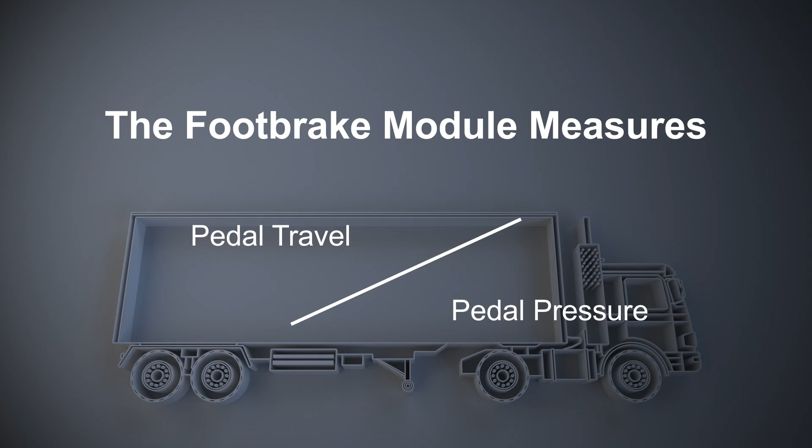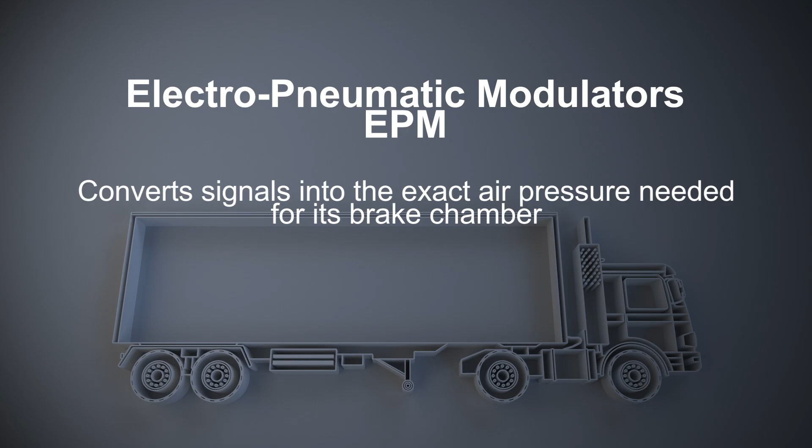When the driver presses the brake pedal, sensors in the digital Footbrake module measure pedal travel and pressure. That signal goes straight to the EBS control unit, which instantly calculates how much air pressure each wheel needs for stable, even braking. It then sends that command electrically to the Electro-Pneumatic Modulators, or EPMs. Each EPM takes the electronic signal and converts it into the exact air pressure needed for its brake chamber. The result? Faster, more consistent braking with stability, traction, and anti-lock control built into every press of the pedal.

And here's the best part: even if the electronics fail, the truck doesn't stop braking. It automatically switches to pneumatic backup mode using traditional air control to keep the truck safe and stopping.

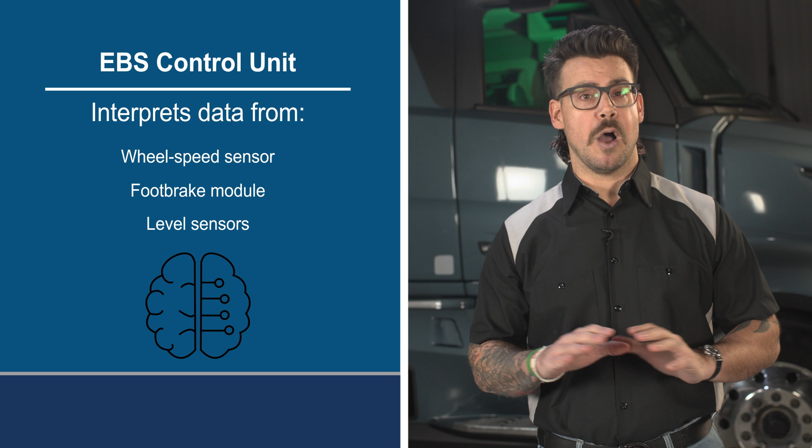At the top is the EBS control unit, the brains of the operation. It interprets data from wheel speed sensors, the Footbrake module, and level sensors to balance braking power across the wheels. Additionally, the steering angle sensor and yaw rate sensor are also used to determine braking pressure.

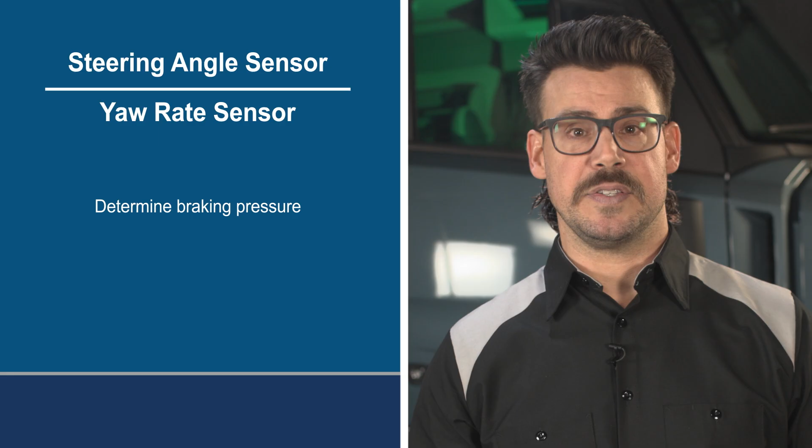On legacy trucks, the yaw rate sensor was externally mounted. Now it's integrated into the EBS control unit, thus mounting is important.

Next is the dFBM, or digital Footbrake module. This unit reads how far and how hard the driver presses the pedal. In normal EBS operation, it sends that input electronically to the control unit. But if the electronic braking system goes offline, the dFBM automatically switches to pneumatic backup mode, physically sending control air to the EPMs to apply the brakes.

These electro-pneumatic modulators are the hands of the system, delivering the air pressure the control unit requests. Each EPM is preloaded from the factory with its own software and firmware, so there's no need to reprogram the component if hardware replacement is required.

Front axles use single-channel EPMs. Rear axles vary depending on the configuration: single channel on a pusher, dual channel on a drive axle for traction control, and 2 dual channels if equipped with 6-channel traction control. For more information, see CBR 2533.

Finally, the eTPCM, or Electronic Trailer Pressure Control Module, functions just like an EPM, but it manages the trailer's braking air. It can also enter pneumatic backup mode if communication is lost.

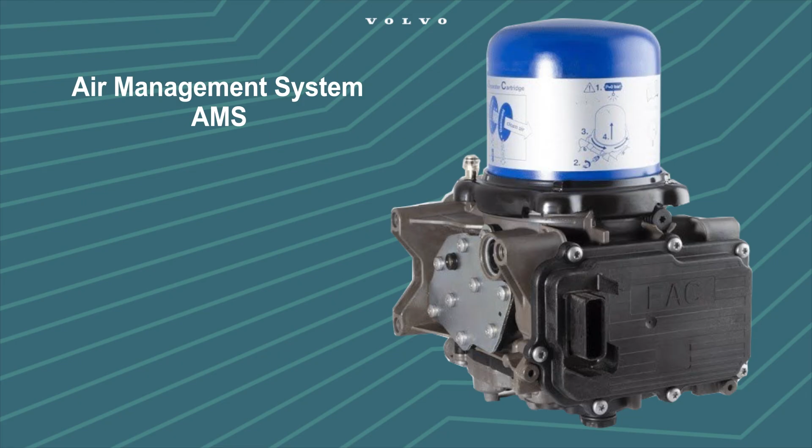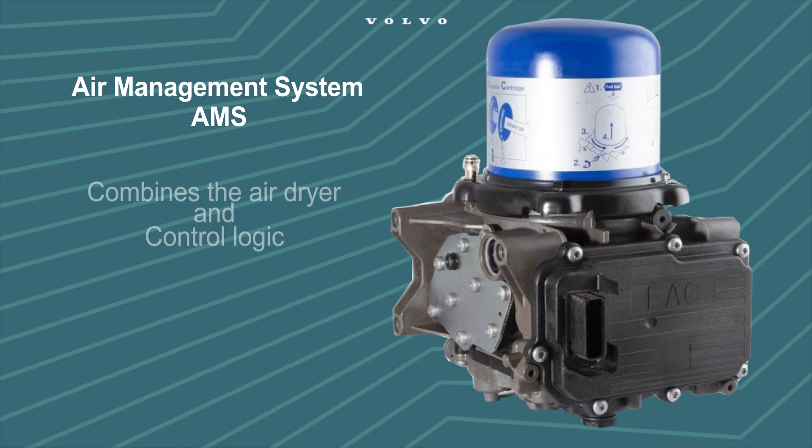Volvo's new air management system, or AMS, simplifies everything. The Air Production Module, or APM, now combines the air dryer and the control logic into one integrated unit. It filters moisture, oil, and debris from compressed air and manages the distribution of air through the truck's system.

It draws power from the 10-amp fuse FB26 in the 12-24-volt chassis fuse box and communicates with the chassis subnet via CAN and hand control units through LIN 12.

Drivers will notice the difference: no more mechanical brake knobs or complex air lines behind the dash. They'll see electronic parking brake levers, auto release when selecting a gear, and auto set when parking. This system's smarter, safer, and a lot easier to work on.

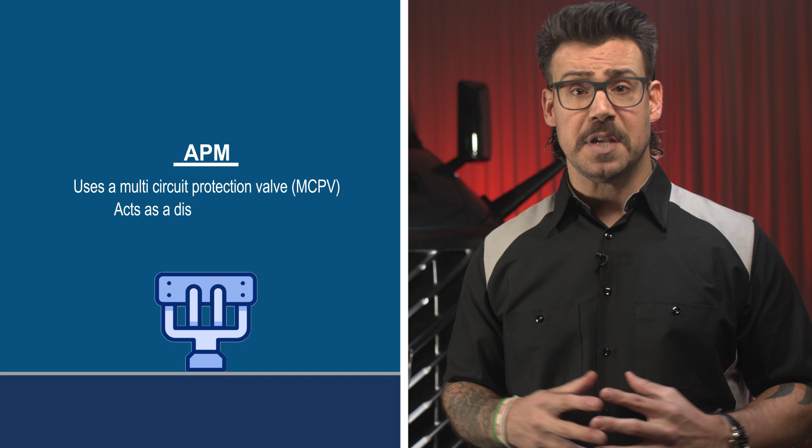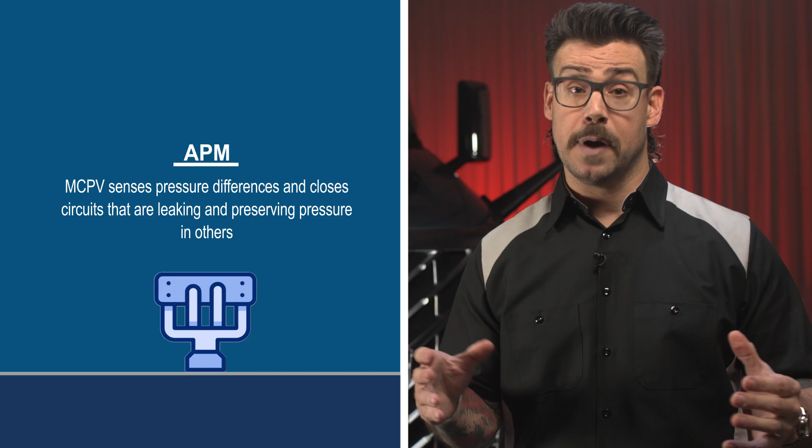Legacy systems rely on check valves to isolate failures. The APM now uses a multi-circuit protection valve, or MCPV, which acts as a distribution manifold. If a circuit starts leaking, the MCPV senses the pressure difference and closes that circuit, preserving pressure in others. When this occurs, the system will present an active DTC, which aids in troubleshooting.

That means the driver can continue driving at limited capacity. It's a smarter design that prioritizes braking power above everything else, keeping the truck safe and operational while protecting air reserves. Now, here's where it all comes together.

Under normal operation, the EBS controls the braking electronically. The control unit decides how much air pressure to send, keeping braking smooth and stable across all axles in all situations. But if the EBS loses a critical input, say a wheel speed sensor or pressure feedback signal, it automatically puts that axle into pneumatic backup mode.

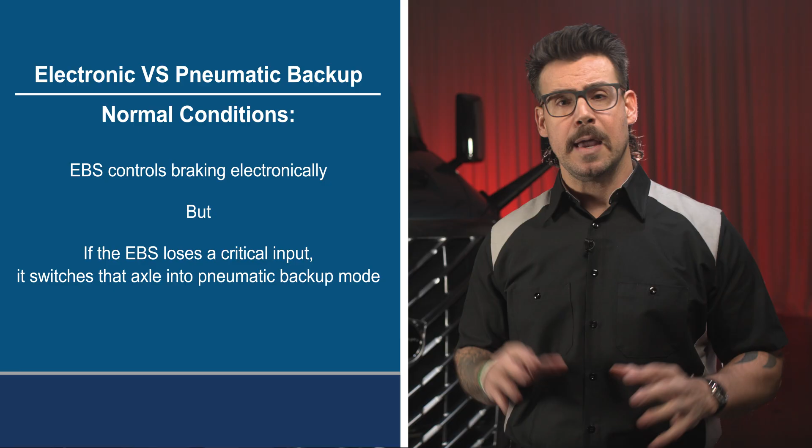In this mode, the dFBM bypasses the control unit and sends air pressure directly to the modulators. It's mechanical braking just like legacy trucks, but without the electronics balancing the force.

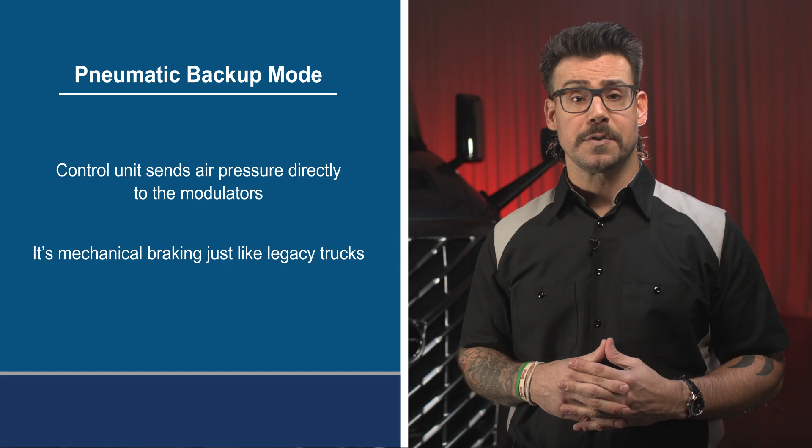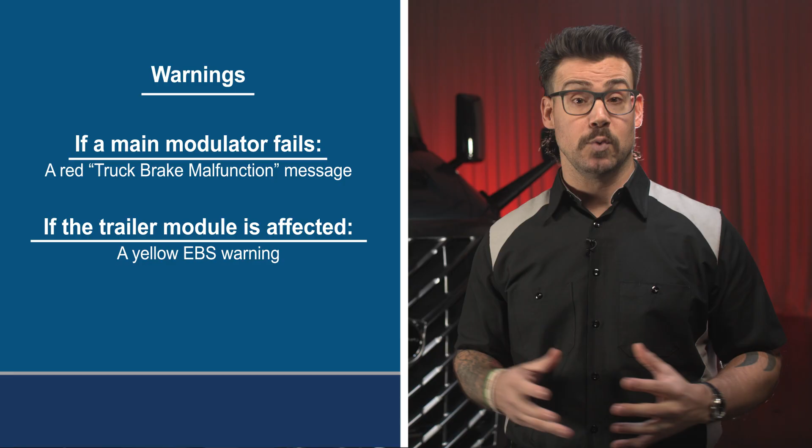When this happens, the driver will see a red truck brake malfunction message if a main modulator fails, and a yellow EBS warning if the trailer module is affected. During backup, brake safety features are disabled: no ABS, no stability control, no traction assist.

The brake pedal feels firmer, response changes slightly, and stopping distance may increase.

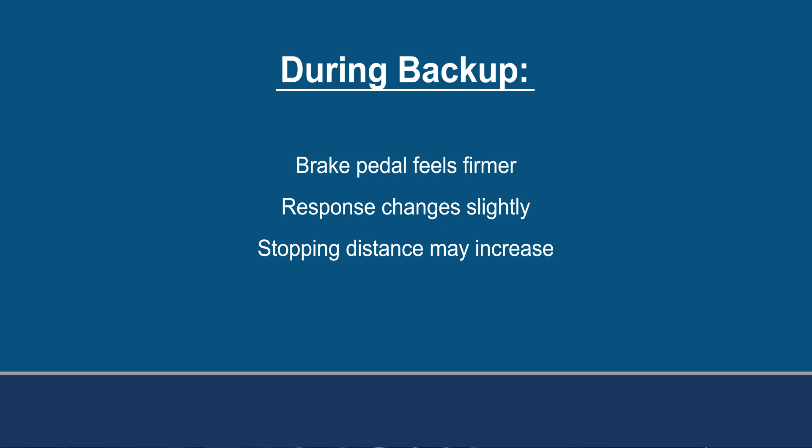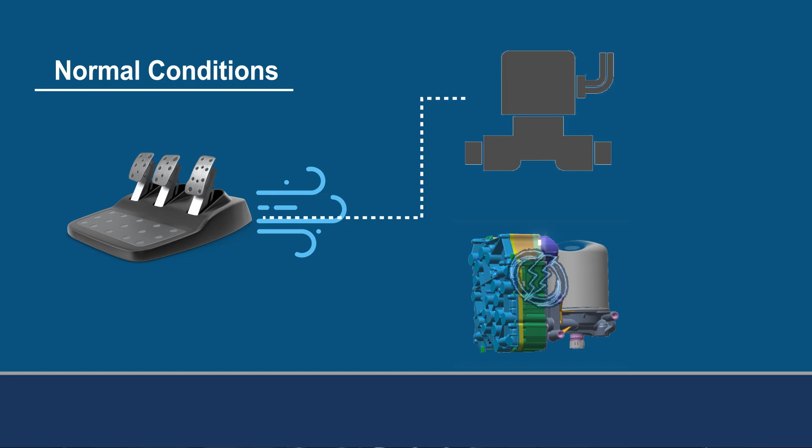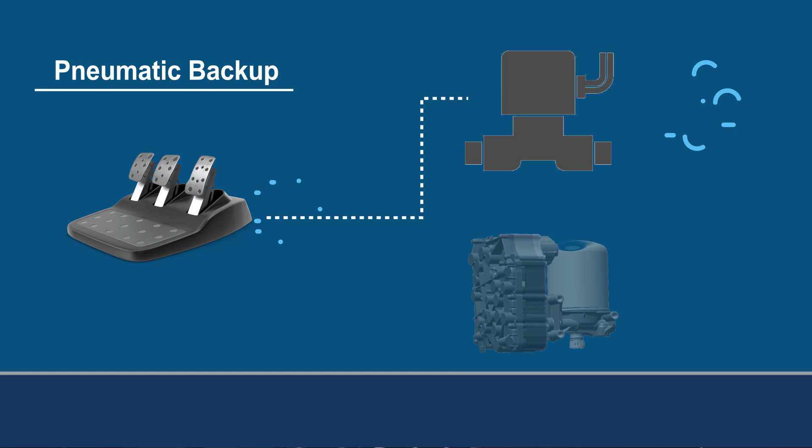Here's what's happening inside. Under normal operating conditions, control air from the dFBM routes up to, but not through, a backup solenoid. The EBS control unit sends an electrical signal that opens that solenoid to allow air to the brakes. In a pneumatic backup, the solenoid opens mechanically instead, letting control air from the dFBM flow directly through to activate the brakes. That simple mechanical failsafe is what keeps the system braking even if all else fails.

To make sure the pneumatic backup lines are always ready, the system performs a silent self-test to confirm the backup air paths are working correctly, not kinked, blocked, or disconnected, so backup mode stays safe and reliable whenever it's needed. This test runs automatically and more frequently in the background without affecting driver features or vehicle performance, typically during normal operation, such as key cycles and brief stopping moments.

For example, right after the truck comes to a stop while the brake pedal is still applied. The test is performed one valve at a time, in sequence: front EPM, rear EPM, any additional EPMs, eTPCM, meaning the truck is not placing the entire braking system into full backup mode. It's only opening the backup solenoid for one valve at a time, recording the result, and then moving to the next valve.

If a valve passes, the system stores the pass date and time for that valve. If a valve fails, the driver will receive a notification to rerun the test to reconfirm, and the system will either clear the issue or keep the warning active depending on the outcome. If the test is not run for 150 days, for example, the truck has been parked and unused, the cluster will prompt the driver to complete the test.

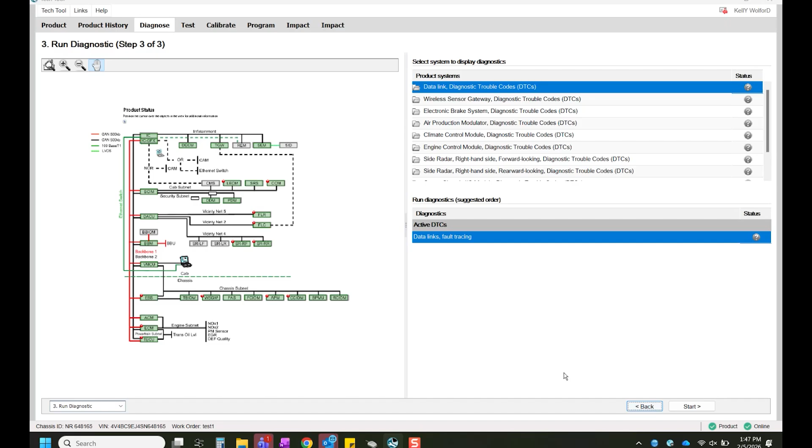When it's time for service, use TechTool's guided diagnostics to confirm the issue before replacing anything. Start with the temporary backup mode test. This checks that the pneumatic control is working properly. If it passes, the message 'Vehicle ready to use' appears and warning lamps will clear.

If it fails, you'll see red or yellow EBS warnings along with fault codes indicating which modulator or circuit needs attention. Next, run the reverse validation test. This verifies whether that failure was real or simply procedural. For example, low pressure or parking brakes still applied.

If the test fails twice, take the truck out of service and investigate further. If it passes, clear the codes and recheck sensor readings.

Now, let's talk about the most common issue you may see in the field. The C10129B fault indicates high or excessive flow. This comes from older APM software versions that kept counting airflow after shutdown.

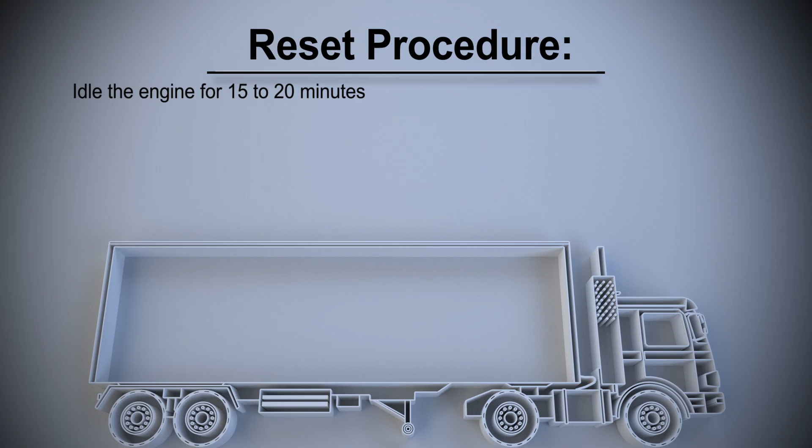Here's the one-time reset procedure. First, idle the engine for 15 to 20 minutes. Then, shut the engine down, but keep the ignition on. Open, but don't start, TechTool Operation 5618-07-03-02. Now, restart the engine.

Let it run for 1 to 2 minutes to recharge the air system. Next, execute the operation, then confirm the DTC clears. This fix is one time only. Any future occurrence requires following standard guided diagnostics or escalation through eService.

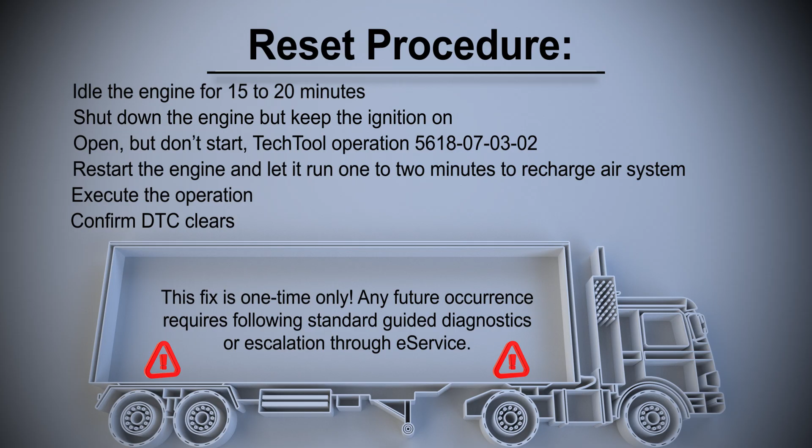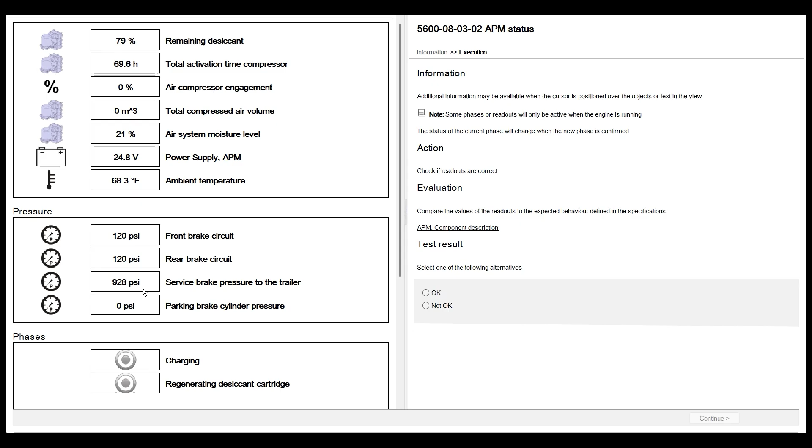In TechTool, the APM status test is your go-to. If you see a 928 psi pressure reading that doesn't change, that's a failure flag. The EPM tests work the same way. If it locks to 928 psi, that modulator isn't responding.

For wheel speed sensors, look for readouts around 0. A reading of negative -0.004 or similar indicates a sensor fault or wiring issue. Always verify these readings before swapping parts. Most faults are connection related, not component related.

Additionally, before performing any EBS or EPB repairs, make sure the proper training is complete. That's courses 500-990, 500-997, and 500-999.

To recap, the electronic braking system gives you precision braking under normal conditions and safe pneumatic control when electronics fail. The new air management system and APM simplify the air circuits while improving reliability with the multi-circuit protection valve.

If you see a red or yellow EBS warning, check the codes, verify air pressure, and run the backup test before replacing any parts. Remember, most issues are procedural, not hardware.

EPMs come preloaded with firmware. The system self-checks every 150 days, and guided diagnostics will point you in the right direction every time.

When you understand how the electronic braking system operates, both electronically and pneumatically, you'll diagnose faster, prevent unnecessary replacements, and keep every VNL safely on the road.